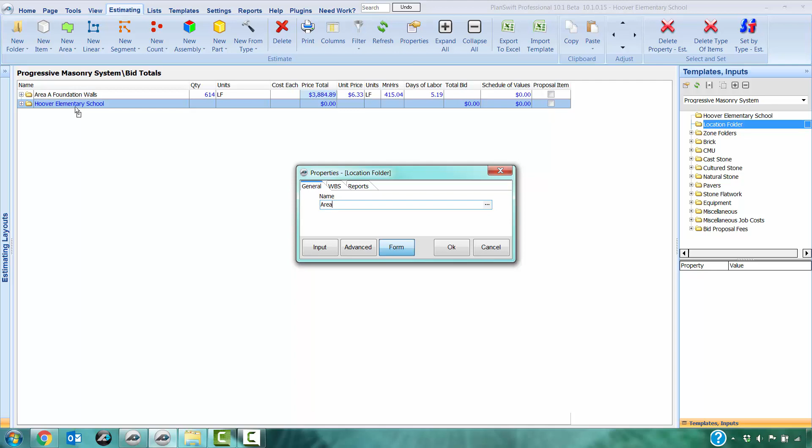All right, on this job here, the building is divided up into 3 different sections, so we are going to use the location folder, and we will just drag that in, rename it. In this case, we're doing area A, and we'll expand that so we can drop in a zone folder, a couple of them actually. We will throw in the CMU and the brick. And I'm going to move this to the top. Okay. All right, we're good to go.

I've spent about 15 minutes here looking through some stuff, so we're not taking too much time looking for details, so should be able to go a little bit quicker here. All right, so there's our folders. We're ready to roll. I guess let's start here. We got an elevator right here, and let's see, that is 29, wall type W1, 29. Number 5 at 48.

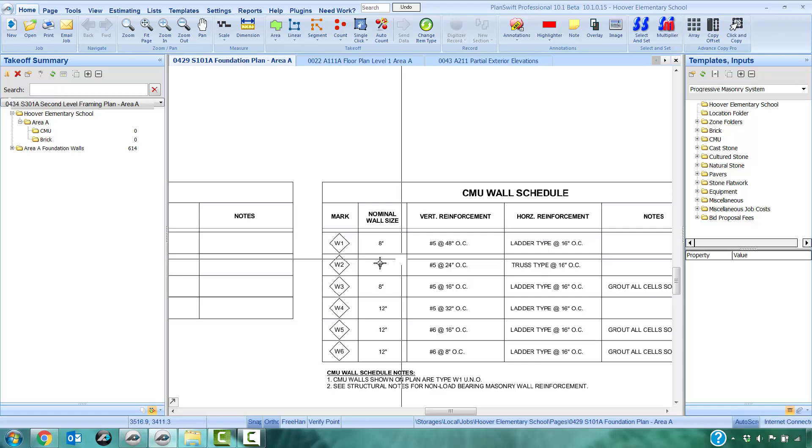Okay, so we're gonna open up our CMU folder. There's our CMU assembly, and we're gonna left click on it. And I found that it goes a lot quicker if you stay off the actual digitizer, the page. If you drag it up around the top, it seems to load in faster. Here in this case, it might not with the video running and a few other things I got going, but if you drag it across the page, it seems to take about 2 to 3 times as long for some reason.

But that's what the great folks at PlanSwift have left us with. A 32-bit system that 20 years ago I was playing 64-bit video games.

Okay. Again, we were 29. We are going to do scaffold. We are on the floor plan. If you uncheck that, you can actually draw out on the elevation views, and it will actually draw the digitizer 29 feet tall, I guess you would say. Line side, that's your choice. You pick what you're going to do there. In this case here, I believe I'm going to have to switch since I'm going on the inside of this wall.

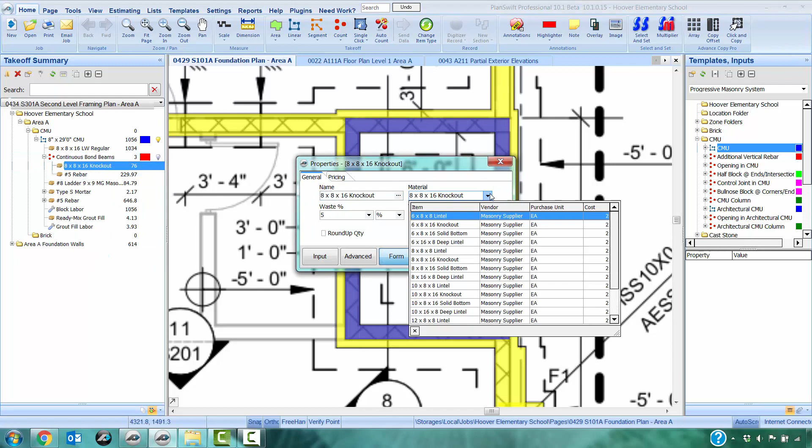So I'm going to change this to the solid bottom. Whoops, I could have done that a lot easier. But anyway, to get the other ones, what I'm going to do is I'm going to duplicate this. I should have left it. And what I'm going to do is right here, I'm going to select the 3 again. And then I'm going to come here and change the block back. So there we go. So now we're back. Now we got 3 knockout courses there, and we have 3 solid bottom courses there.

And I forgot to mention, if you duplicate that and do them separately, individually, you need to leave this blank. So we won't do anything here since we're going to duplicate that. So we will X that out, come back here, and we got 3 of those.

The reason why I do them separately is there isn't a whole lot of difference in one block and the amount of grout it takes to fill a solid bottom bond beam block compared to a knockout. But on this school, we're probably going to be hitting somewhere around 100,000 blocks, so it's actually going to make quite a bit of difference.

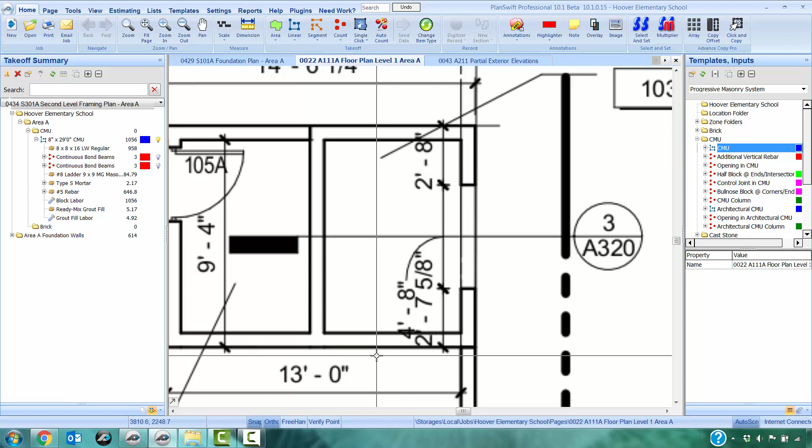Let's see, we got an opening here on this too. Let's go to floor plan, see if they give us a door size. Well, yeah, you got 4'8" there. Okay. 4'8", and again, I'm looking at my other screen here. It'll be 4'8" by 7'4".

So what we'll do is we'll come over here to the right, and right here we got our opening in CMU. We're going to click on that. I'm going to drag it around the top. You must drop it in the wall that the opening goes in. Some of you are just dropping it in the folder, dropping it in random places. That is only adding stuff in. Actually, it's not subtracting anything if it's not in the wall that it actually comes out of. So it's very important that you get that in the right spot.

Here on the opening type, it's got a few options put in there. You can type something in. You can put in whatever you want, call it whatever you want. If it's a window opening and you call it a door opening, there is no difference. It does not know. It's basically for your reference only. So set door frames, that is linked to a labor part, and it just charges a set amount that you specify for setting door frames for the CMU walls after the fact, obviously. So we're 4'8", and we were 7'4".

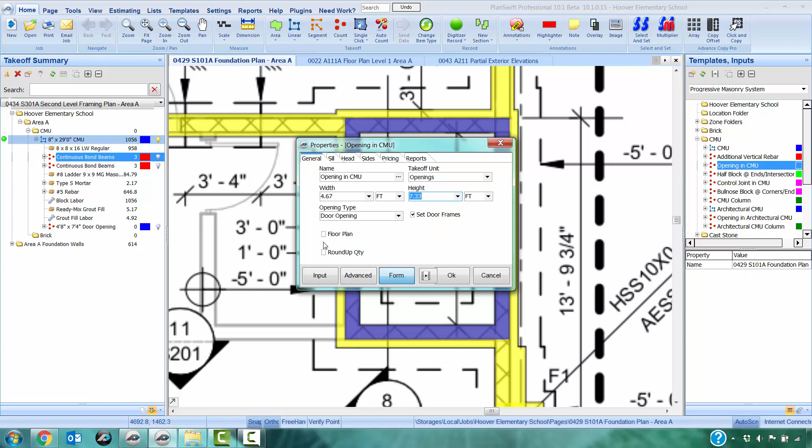Let's see, floor plan. Actually, most of you don't have this option, but anyway, if I hit floor plan, that's going to give me the option to actually put my opening here on the floor plan instead of going to another page and putting it there. In this case, I'm going to do that. Once I click that, you see this symbol rotate box pops up. The default is the door is going to be basically sideways here, like you're looking at it from the top. So we'll just do it and you'll get a better idea.

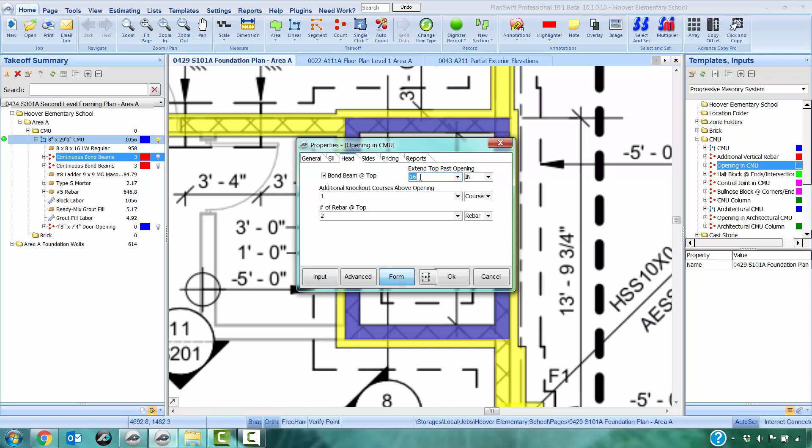Door opening, we got nothing there. In this case, we're not going to have those either. And what do we got at the top? We have a solid bottom bond beam with one knockout above it. So we will select one there. There's our solid bottom bond beam. We have two number 5s, so we're going to select 2 here. And we got to be 16. And this number here, this is each way. This is not a total. So this is 16 off each side of the door, so 32 total.

Verticals per side of the opening. This is the additional bar at the jambs. On this job here, we actually have 3 on each one. This here, it's going to grout those cells. It's always going to grout at least those cells, no matter what you enter. You can make it grout more. You see that occasionally where you have 1 bar but 2 grouted cells on the side. If you leave it set to what it shows there right now, that is simply going to grout everything with rebar. And again, the pricing and reports tabs, we're not going to mess with. So we'll hit OK.

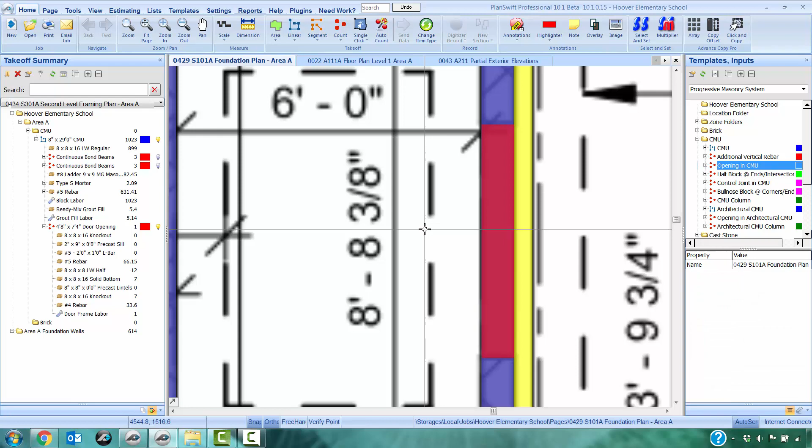And we're going to drop that there. I'll change the color on that. So what it did is just put my opening here, and put it to the size of the wall. So I can just drop it right there, instead of going to another page and putting it there. And that's what this symbol rotate does. You'll see it start to move here depending on what you select. Obviously 180 is not going to be a difference. So it is what it is there.

And even though most of you are used to seeing that big opening like that on an elevation page or a wall cut or something that you throw it on, it doesn't matter what size this thing is, it's in there. It is making the proper calculations. It doesn't matter what it looks like because it's all based off of the information that we input. The size of the opening, since it's a point count, is really inconsequential, because it just makes no difference.

So that's it for our elevator shaft. You're going to see the dead properties in here. If you want to, you can delete them. Myself, I actually have written a little script to delete this stuff later on when I click a button. So I'm not too worried about it right now. If you are, you can delete the items that you have not used.

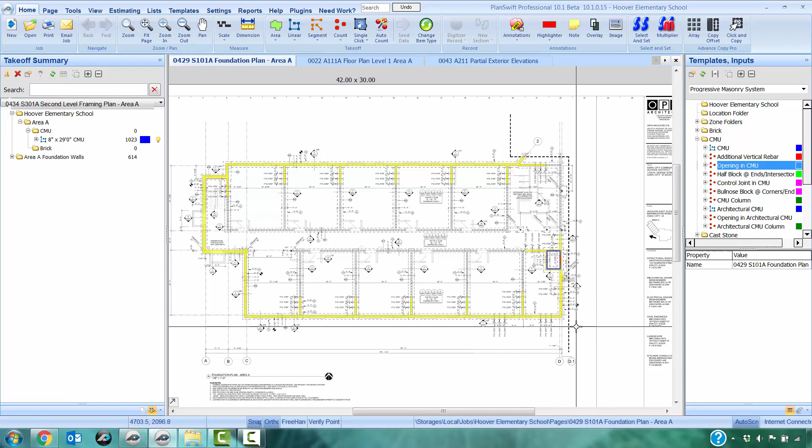We're going to be 28.8 with 1, 2, 3, 1, 2, 3. Wow. We're going to be 28.8 with a bunch of bond beams. 28.8. So what I'm going to do is I just right clicked on that and I'm going to duplicate that wall. It's got some things already set for us. You see when I duplicate it, it just has a 0 value, but it has all the settings that we altered are still where we put them. It's basically just a fresh one. So instead of dragging another one in, I just do it this way.

So we're gonna be 28.8. Again, that stuff's right. That is right. And I'm gonna rename this exterior CMU. Change the color. All right, the rebar. I should have looked. I think these go to 24 if I remember right. And again, the rest of the stuff's going to stay the same. Bond beams, we're going to leave it blank again because we have two different types. They're already put in there. We just need to change the quantity on them maybe. So that's it there. Let's check that here. Yeah, 24. So, all right, we're good there.

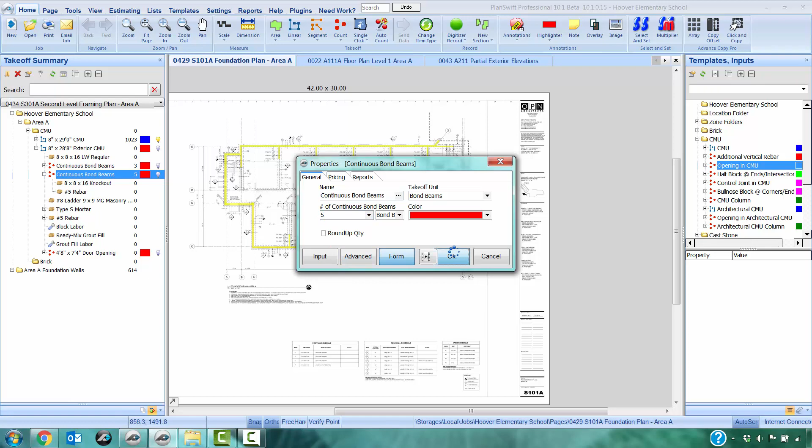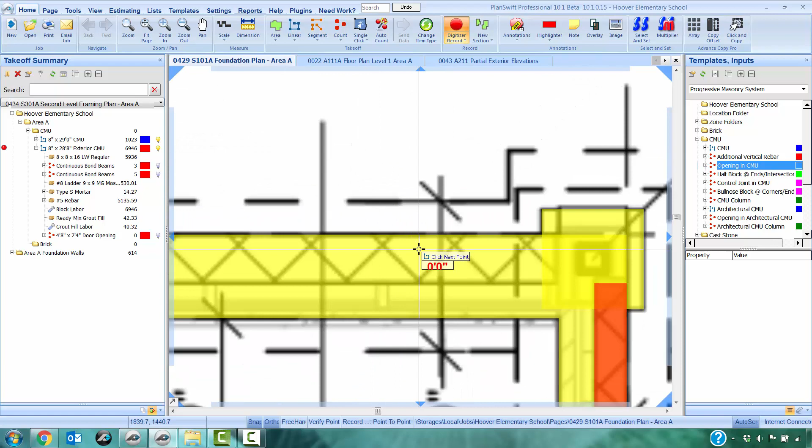What do we have? 3 solid bottoms. There we go. We need to change that one. We actually got 5 knockout courses there. So, okay. What else? Nothing. That's gonna do it. Okay. Start it up, and I'm just gonna start here right at the elevator and go. What am I doing here? Oh yeah, I'm stopping 11 and 5/8 short, so I just go to there. That's a 12-inch block there, so we're gonna skip that. Looks like I got 12-inch block all around this stair tower. We'll come up here and same problem here. Tell you what, we'll do this, and we'll just come back and delete that.

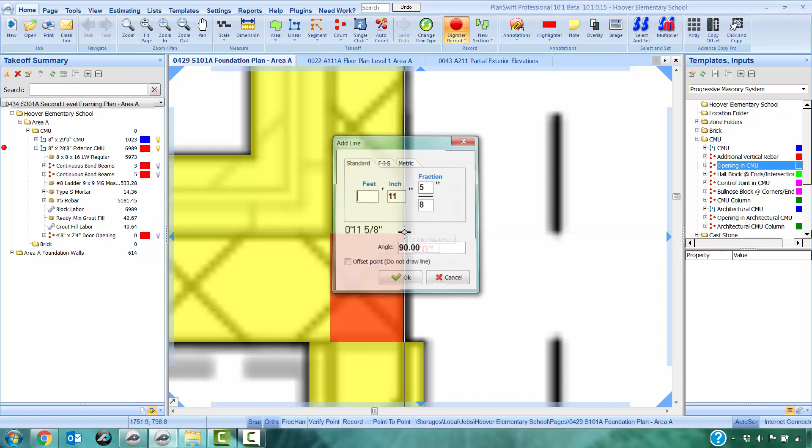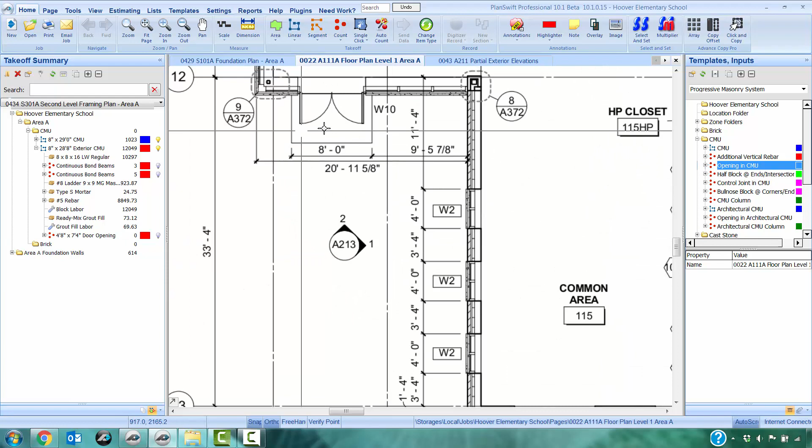Okay. Alright, that's it for the perimeter, or the majority of the perimeter. I'm going to come back here and just delete that piece. I'm going to run that 12-inch wall through there. I guess I always run the bigger wall through in cases like that, unless it's very specific not to. The bigger wall, the block costs more, so let's get a little more in there for it. So, okay, so we got that. That is the majority of our perimeter, except for this here. And let's take a look at that, where we got to be. 213. Okay. 1 and 2, 213. Okay, that'd be the 8-inch wall that we already have.

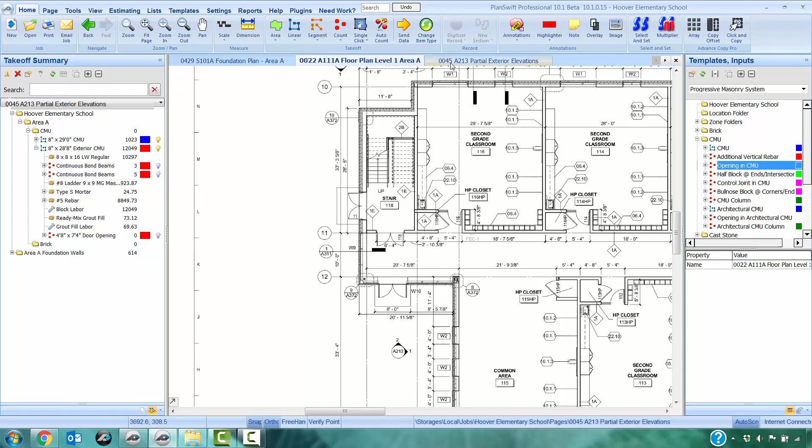Oh wow, we got 1 course. Now we got 2 courses because we're 1 course below the slab. The top of the foundation wall is actually at -8, so we're gonna have 2 courses of that 12-inch block there. So, and what's this? This must be where that continues on that other side. Is that here? Looks like it. We got that brick there and it stops. Yeah, it looks like that's it. So that 12-inch goes to where the brick stops. Where's that at? Grid line 11. So, okay. Alright, so we got that.

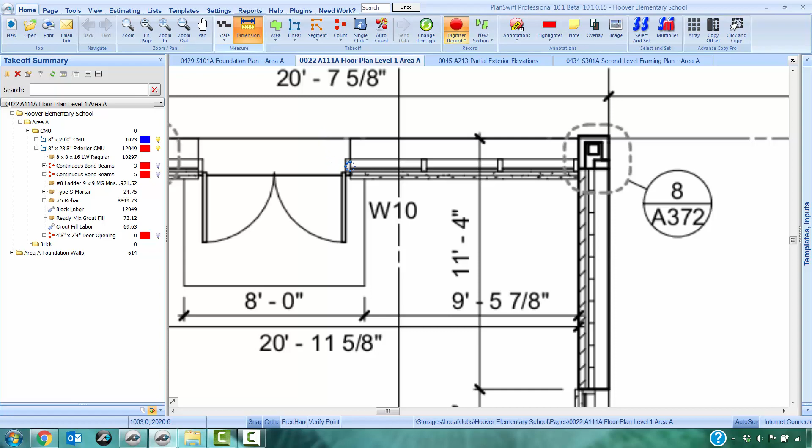Okay, so again, I'm just going to duplicate this. We got to change some things on it, but again, it duplicates a lot faster than it drags in a new one. So let's do that. We were going to be 2 courses. We're not going to have any scaffold there. Let's see. This is going to be. I'll tell you what. Let's just name this at. Whoops. Let's do that. I should have looked at that. No bond beams, obviously. Let's leave it at 24, see if we get lucky.

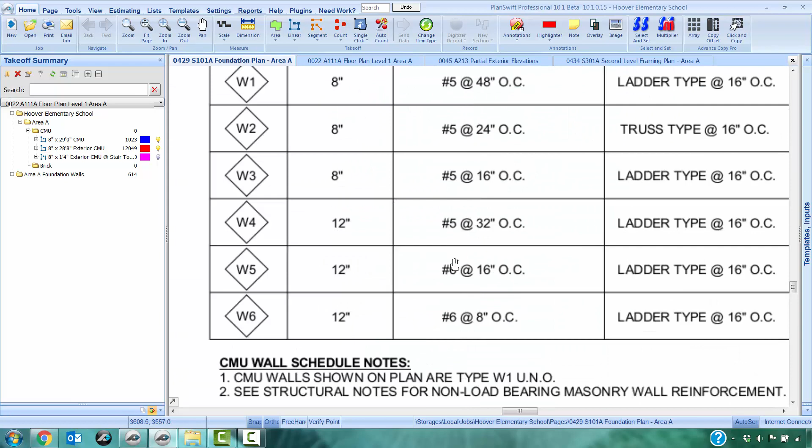And what are we going to do in that? Hell, they're going to have bars sticking up. Let's take the bar out. And something like this, we're just going to have to grout it solid anyway. Really got no choice. We got the rebar positioners left on, but without bar in there, the rebar positioners are going to be at 0 anyway. So it's not a big deal to turn that off. So let's hit OK. Let's get a wall type here, W4. W4, number 5 at 32. Swing and a miss.

Why the hell did I care about the bar? We took it out. Alright, good idea. Anyway, let's go back to drawing. Where's this one going to start? That's going to start in the line right here, so I'm going to do this.

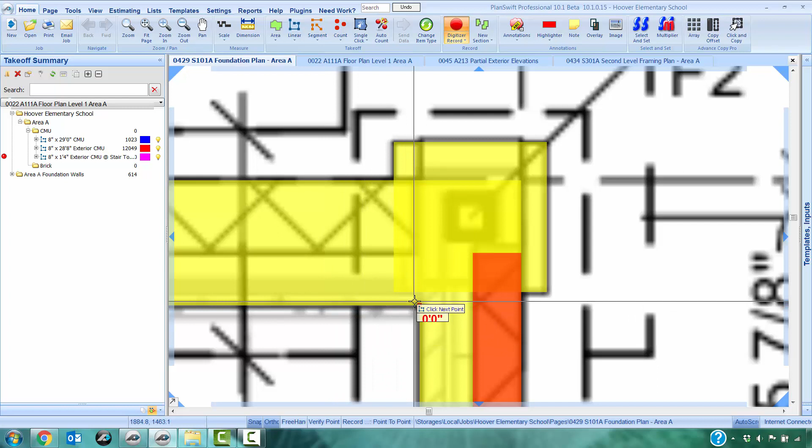Line me up. Don't worry about the line size. I will. We'll fix that. We're good though. What do we say? We're gonna go 10, 1. And let's just do a new section. And to get across the door, I'm gonna do this. So now I got that piece there.

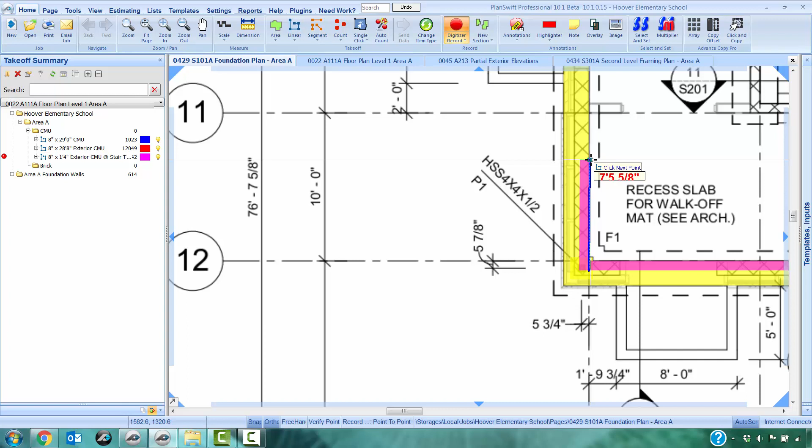And let's see. I know I'm gonna have to come back and change this one. Let's see, 10, 10, so that's going to be 10, 7 and 5/8. Alright, so let's go back and change our block that we never did. Where are we at? Right there. And 12. 12 by 8 by 16, lightweight regular, good enough.

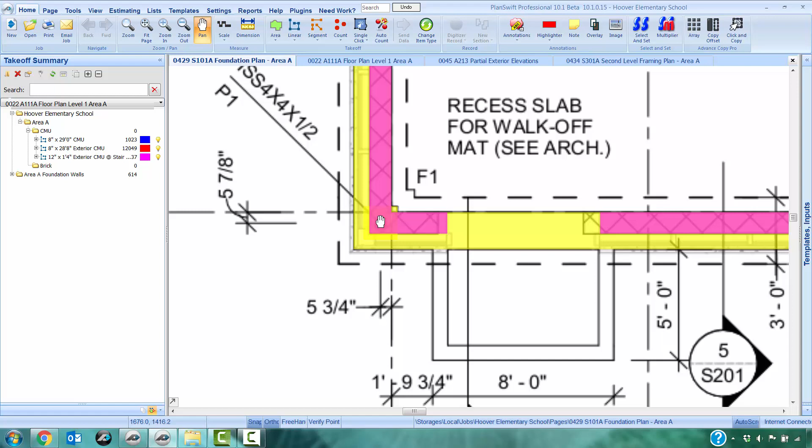But okay, and like I say, we got to come back and take that right to there. And I left that in there for this reason. Done. So we're a little off of what it shows. But if we look at it, it really lines up with where that stoop is. So it looks like just the block hatch pattern was maybe just a bit off.

So anyway, these here, since we do have them set, that's why we're seeing a negative number there, because we actually entered a value here. And I'm just going to delete them since I know we're not going to have them. And there we go. Now we're good to go. Obviously we're not going to have that. Okay, that's it there. I believe the rest of that wall is going to go back up to that 28.8.

So, whoop, wrong one. So we'll just take that one. Oh, son of a bitch. That was silly. We should have left those in there, duplicated it first. Anyway. Alright, 28.8. We're going to have scaffold again. Let's get us a different color. The bar, what was that? 32. 32 on center. Not grouting it solid this time. And we're going to leave those blank because we're going to fill them in.

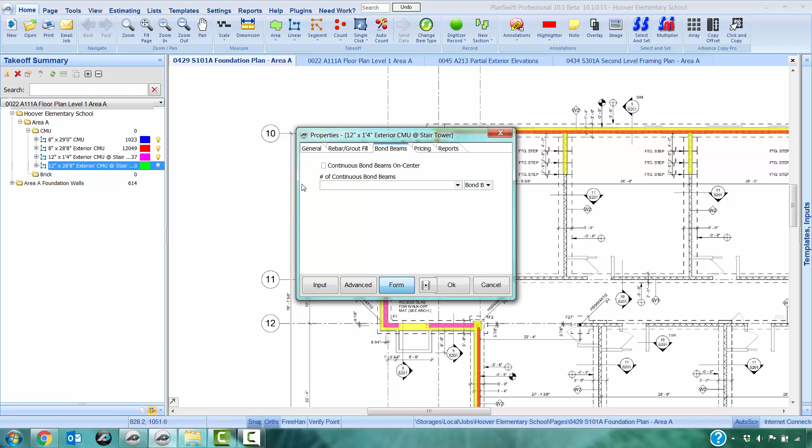We got 3, 3, we have 3 and 4. So let's go back to here. Let's get those. Of course, I can't copy them right next to each other like it should. So we got 3 and 4. So we'll just change this. Okay. Yeah, we're ready to roll. All right.

Okay. So there's that. We do have an opening there. I'll tell you what, we'll get our openings after we do the bricks so we can snap to them. Because we got opens and all that other stuff too. The reason I left this one out is that slab's going to get poured up there anyway. I guess maybe there's a chance that they would end up putting a block in there in the bottom, but not the top.

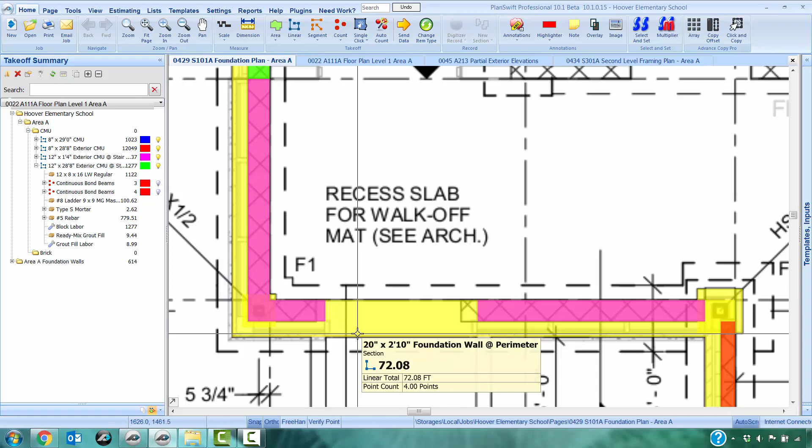But actually, no, there's not, because that would be the top of the slab, and they're not going to leave that exposed like that. So, pretty confident that they're going to pour the slab through there. But this one here, obviously, the block's 20 some feet above the top of the door, so we got to put it in there like that. Let's start getting these interior walls.

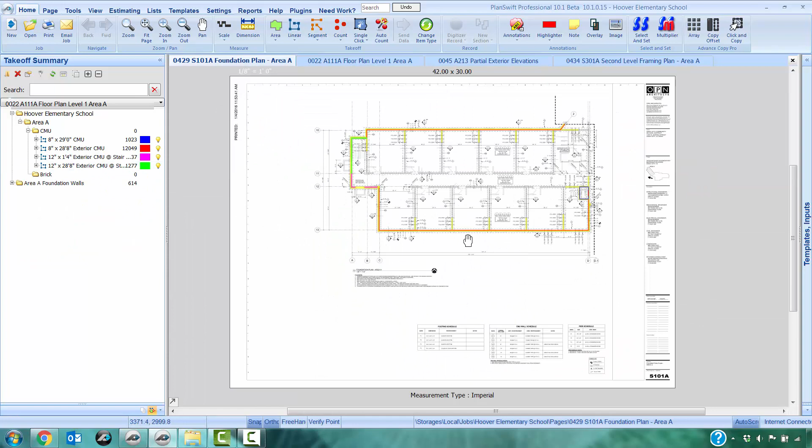13.4 to the top of the slab. 10-inch hollow core plank. 4-inch topping slab. 14. That's gonna make it 12'2". 12'2", and those walls are a W2. That's the 24 on center. Yep. So I am gonna take that one, duplicate that, and let me say we're at 12'2".

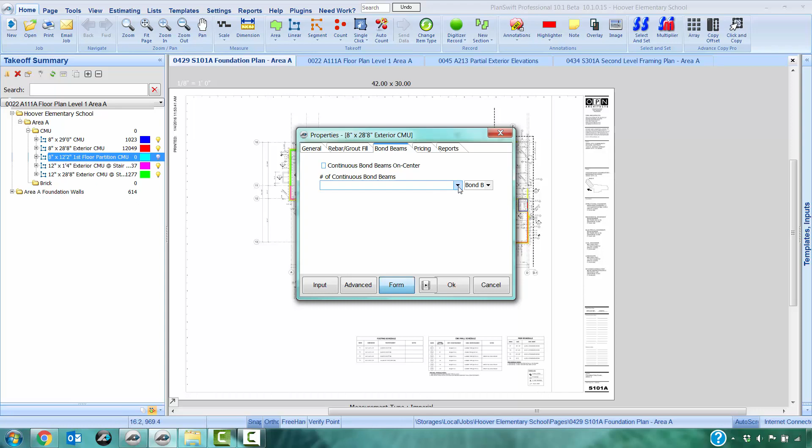Okay, and actually none of these have a door opening. Sure don't. Let's just get rid of that. I don't know why I'm doing that, but I wrote that script for it. Okay, so the way I'm going to do it is I'm going to do it to right here. Then I'm going to offset it. What do we? 32.8 I said.

And 27, 28.7 and 5/8. There we go. Looks pretty good. And yeah, stop short so we can run this corridor wall through. Actually, after doing the concrete, these footing spacings are the same here. What are we going to do? Tell you what, let's just do them both at the same time.

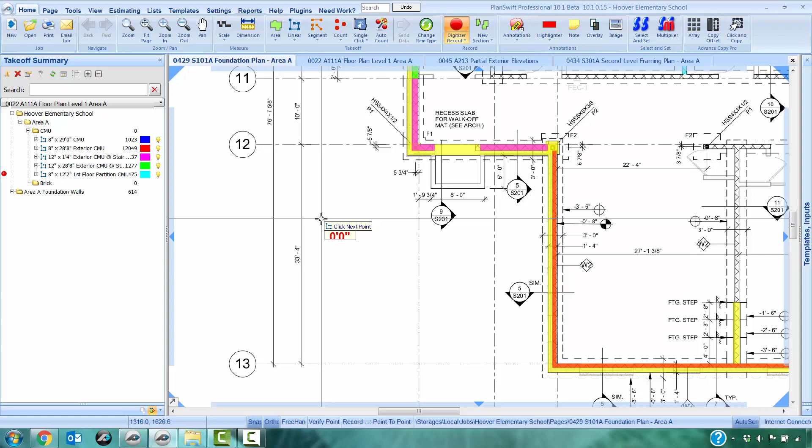I need to be where? 33.4, 32.8, and 3/8. 32.8 and 3/8. Can't even see it. So is that right? 9, 8, 3, yeah, that's right, 6. Okay, now we need to go over

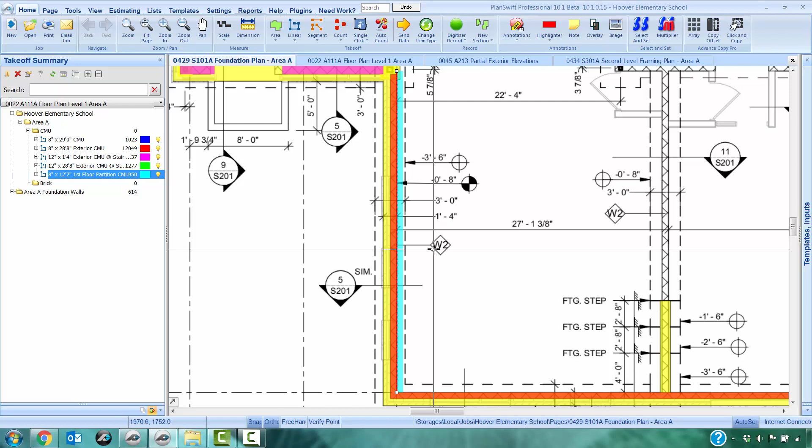26.5 and 7/8. Is that right? Sure looks like it. Okay, now you'll see these are all 28. Quicker way to get all these done instead of drawing them out: hit the control key. In this case, we're going to press the right arrow key because we want to go to the right. This nifty little box pops up. We're going to go every 28 feet. So we punch that in, hit enter, and I think there were 4 more.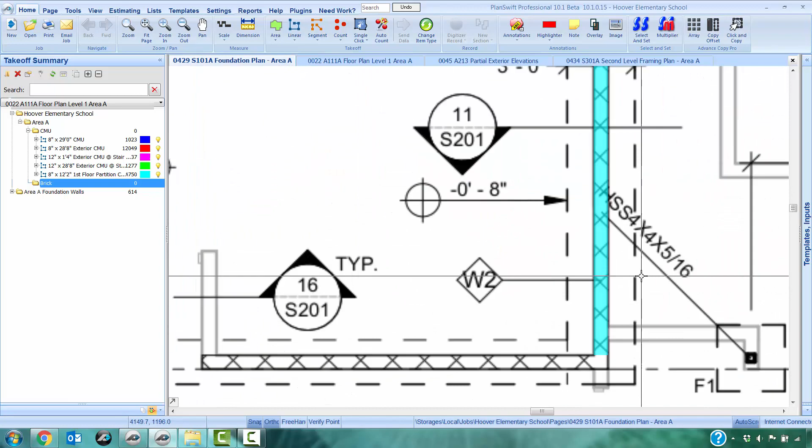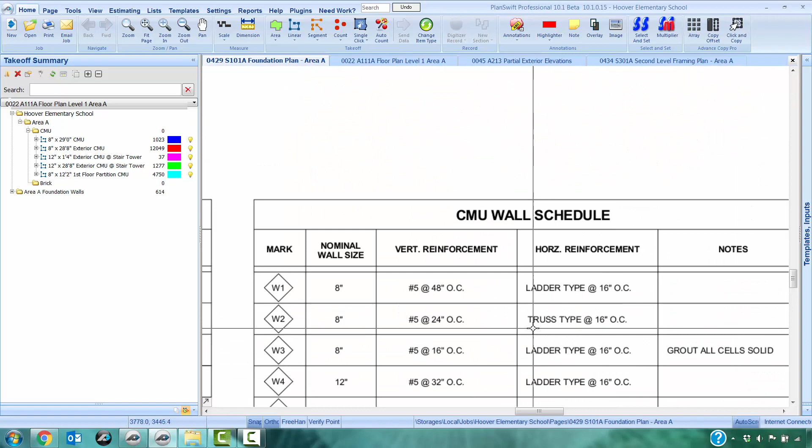So I'm just going to hit 4, hit enter, and you'll notice it's going to pop those in here for us all the way down. So didn't have to draw them out. So we got those done. Let's open up here a little bit. Alright, let's get a couple of corridor walls on here. Those are going to be the same thing. Nope. W1, weren't those? Yeah, W2. Number 5 at 48. So let's just duplicate this.

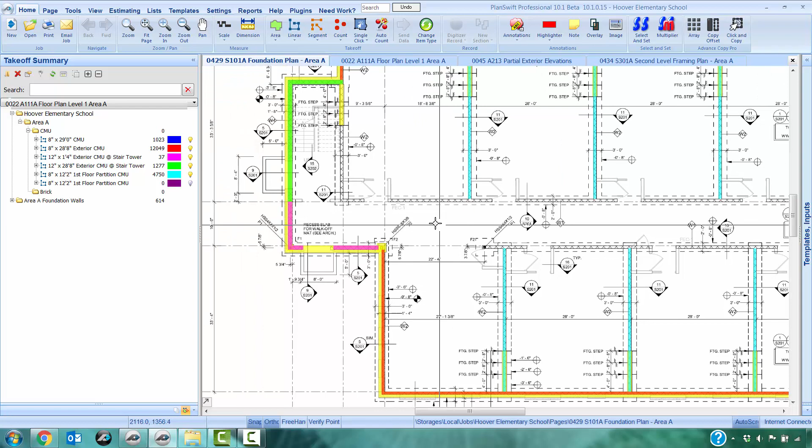And the height's going to be the same. That's good. Let's do that. 48. Bond beams. Same thing, so that's good. All right, how are we gonna draw these out? I guess I got that. No, I don't. Need some measurements here. I remember when I did the foundation, this wall actually stops here, so we need to stop 4'8" short of B. So let's get that one done.

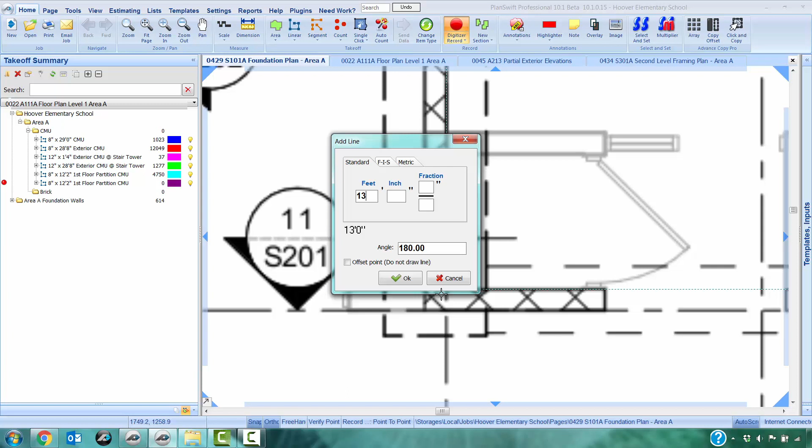What do I want to do? I'll just start here. So I'm just going to snap to here, and 4'8" short of that, 135.11 and 5/8. Okay, and just need to pop her down there. The other one, 22.4 is not right. What do we have? 21.9 and 3/8 from the inside of that wall. Okay.

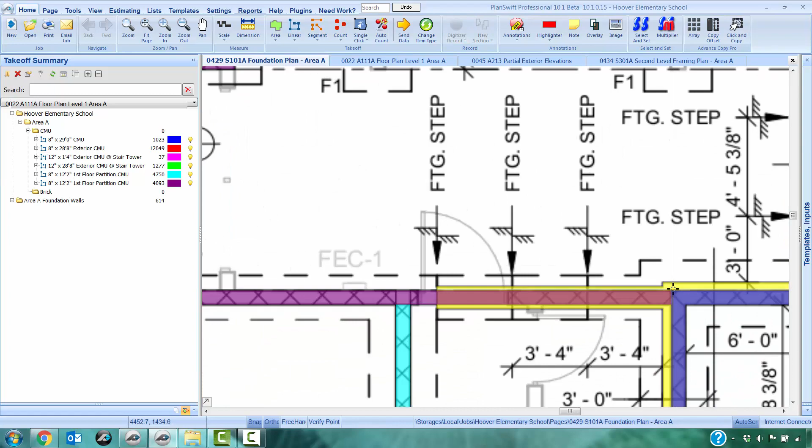Oops. So 21.9 and 3/8, and what are we gonna do? Well, we're just gonna go connect onto the elevator, and we'll come back here and take this out. Okay, that's it there. And actually, no, we got this one here. Let's find out what this is.

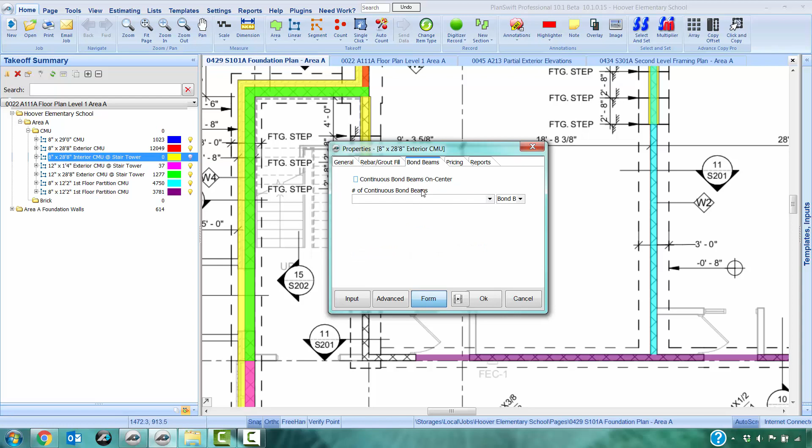That is 28.8 with 1, 2, 3, 4 solid bottoms and 1, 2, 3, 4, 5 knockouts. So let's duplicate that. 28.8. Oops. I just need that part. Okay. Oh, running out of colors. Let's do that because we're gonna get the yellow ones out of the way pretty quick anyway. W2, that is the 24 on center. We're good there, and that's good because we're gonna have to fill out multiple ones again.

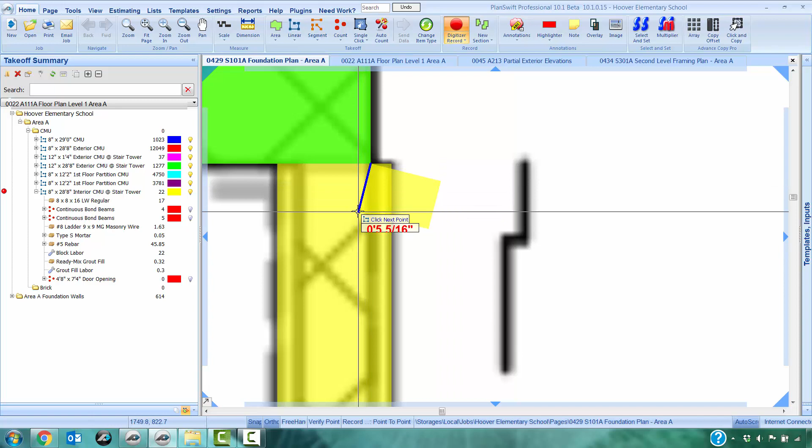Let's see, 1, 2, 3, 4. We got 4 solid bottoms and 5 knockouts. Okay, so we're good there. Let's do it. Oh. Tell you what, we'll do it this way. No, we won't. We'll do it up here. Let's see, we were 4'8". And we'll just go up here and snap to that corner. Alright, that's done. And we got no openings in that at all. Again, I don't know why I'm doing that when I don't have to anymore. Okay, that's it.

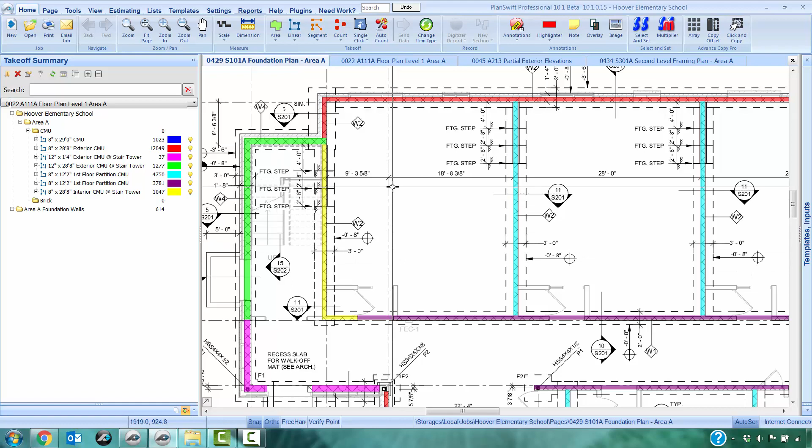We didn't do the openings yet, but it's going to be a lot easier after we put the brick on the outside. Actually the inside we do have a ton of openings here. I'm going to come back to them later. Let's get some brick going, 'cause I believe we're done with that. This here, I'm going to pick this up on area B. It's just a damn mess in there. Tons of different wall height changes and all kinds of extra grouted cells and stuff. So I'm going to pick that up a little bit differently than normal. So don't worry about that.

Let's see. Yeah, I think that was that one. Yep. I need that one too. Is that it? There we go. In this case here, since I can snap to the wall, I'm going to turn them back on to do the brick. What do we got? We got 28, and we're 8 inches below. So we're going to be 28.8 on the brick.

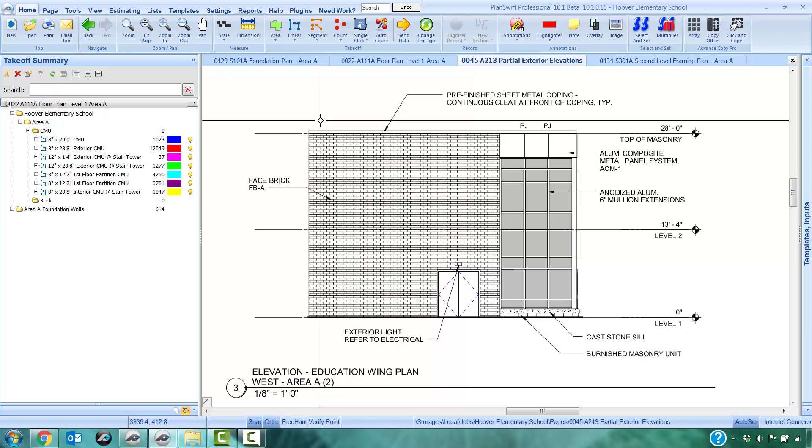And actually that's going to carry pretty much the entire perimeter except for obviously this area there and that there. So this area with the pink wall. Other than that, it actually is the 28.8. So let's get some brick going here.

And we actually have, doing a utility brick. And they got it labeled here somewhere. Yeah, there we go. face brick FB-A. I don't know. I've seen on here somewhere that it's a utility brick. But anyway, obviously that's something you can change anyway if you get it wrong.

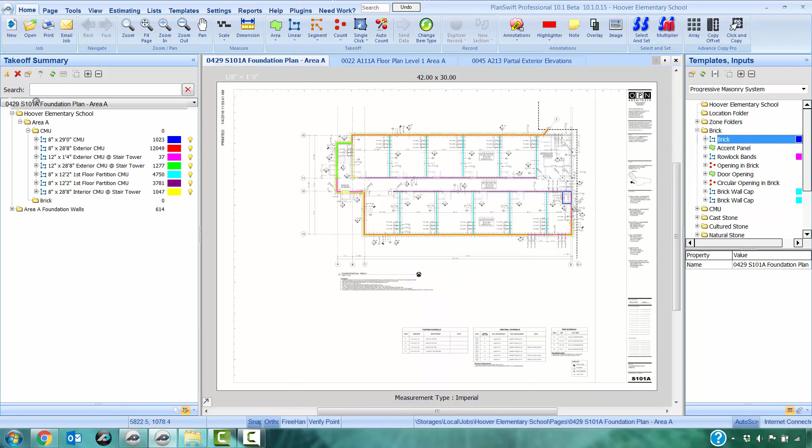Okay, so let's drag some brick in here. Not on this one. Let's go back to here. Try it again. All right. What did we say? 28.8. Brick. What was it? FBA, I believe it was. And again, same options.

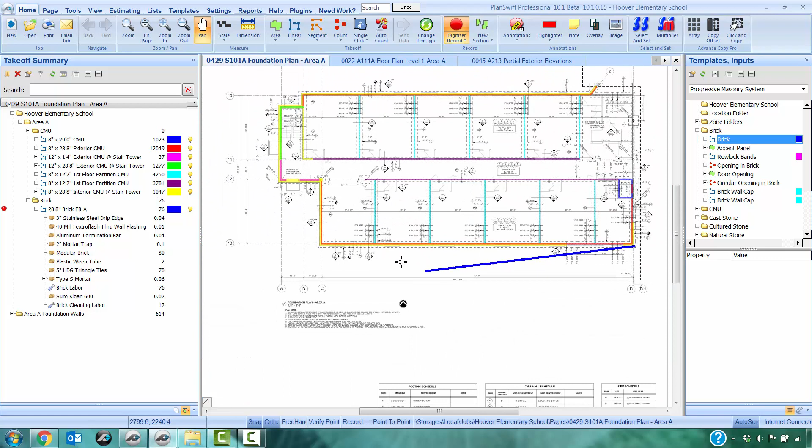I generally do the center on the brick myself because with the brick, you don't have to break it at every corner. In this case, I'm not going to do the center. I am going to break it at the corner due to the fact that I can snap to the wall, and that's going to make it much faster for me here. So, and I don't know how far back that is. So, what I'm going to do is this. I'm just going to take off from there. We'll come back and we'll get a measurement on that.

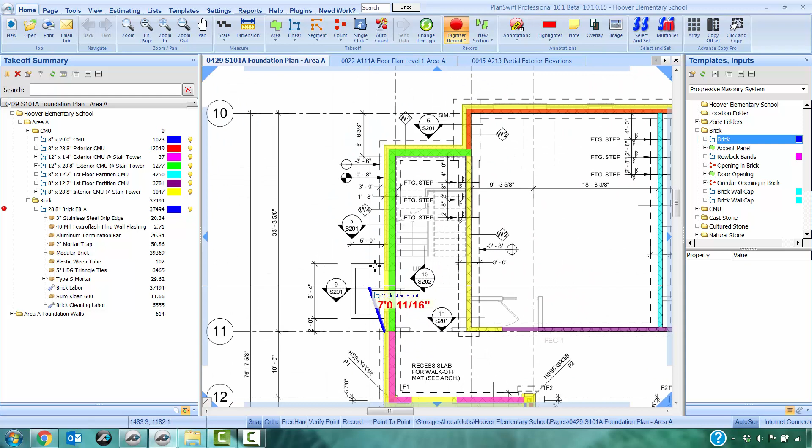And where's this go? Yeah, that is all the way up in there. Okay, no brick there. We start there though. That'll snap me right to it. There we go. Brick is done. Whoa, that's why we see an outrageous quantity. There we go. What else? Oh yeah, this down here.

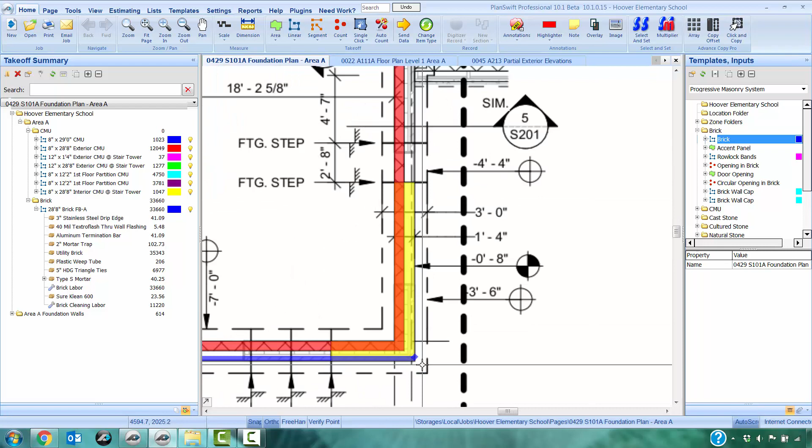See if we can get a measurement off here. We got one? No. Wait, what's that one? Bingo. Look at that. 20 foot 3 3/8 from the face. Oops. That was from the face. Already got that one there, so we'll just do that. Looks pretty damn good. Alright, let's go back and turn this off again.

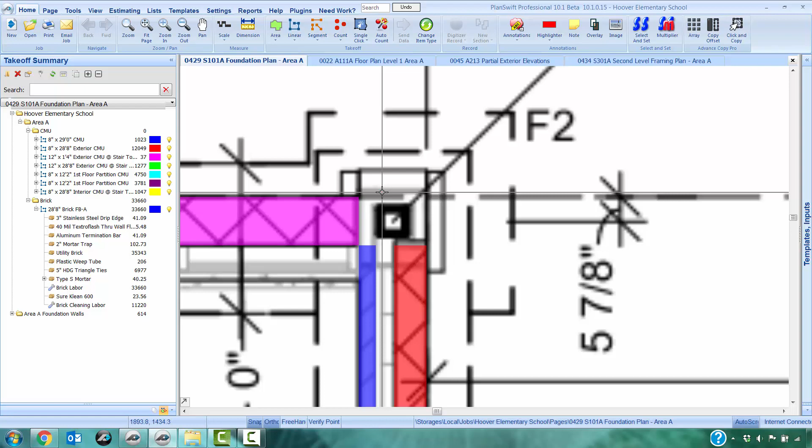Okay, so shrink this stuff a bit. That is it. Now we got our brick all the way around. I'm gonna have to look into that. That can't be right. There's got to be something going there. Probably a bullnose column block or something. I'll bet. Yeah, that's it. The addition area B continues that way. I just did this on the foundation stuff just to get the angle off there to get it going in that direction.

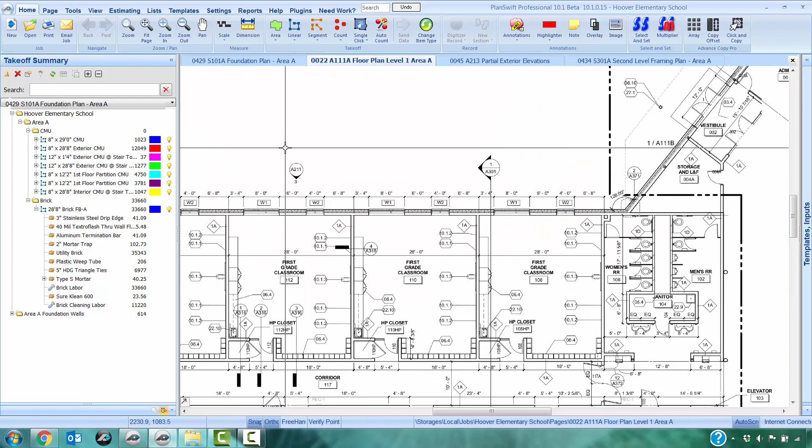So that's it. Let's do some windows in that brick. Where do we want to start? Let's just start up there at that top, huh? 3A to 11. What did I say? Oh, 211. Okay. 1, 2, 3. Yep. All right. Oh, whoops. What do we got? W2, W1.

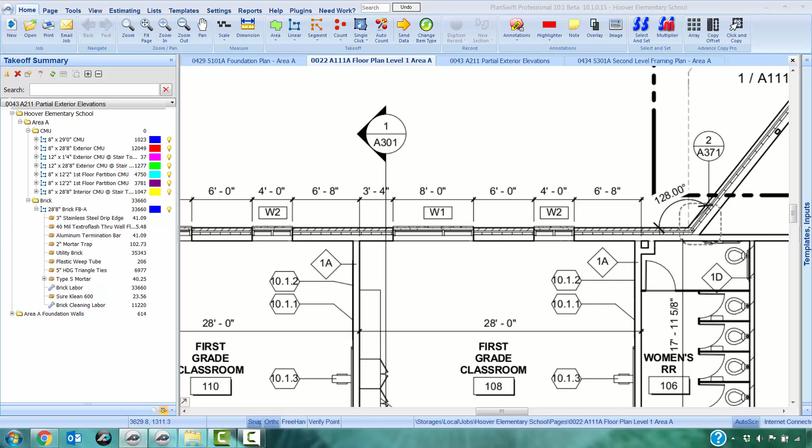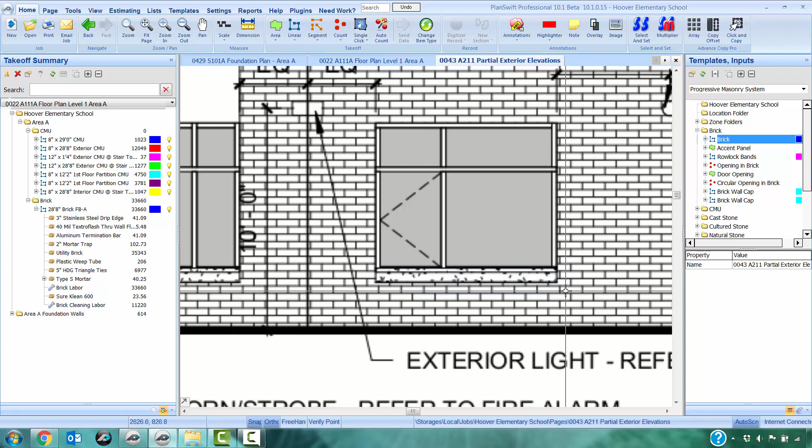W2 is 4 by 20 and 8 by 6/8. Okay. Let's go back to here. 4 by 20 on this one and 8 by 6/8 on those. This job here has these special, I guess they're making a big deal about cast stone sills, but obviously that's not an issue, because we have a button for that.

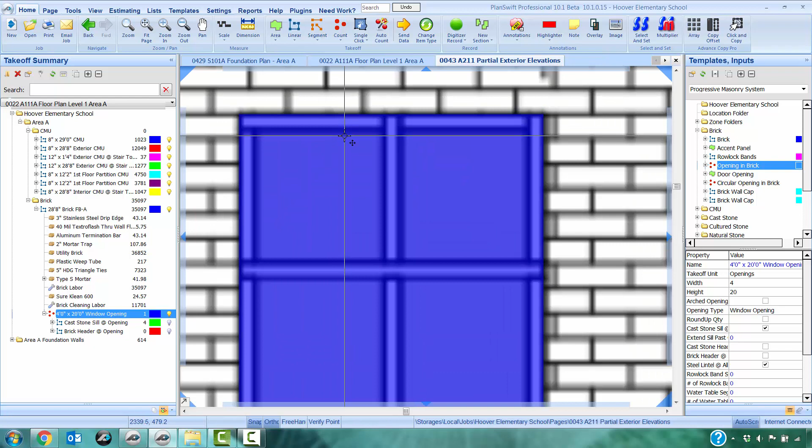Alright, 4 by 20, not an arched opening, it's a window opening, no brick sill, but there's a cast stone sill. It does not extend past the opening, so we're not worried about that. And we got no header at all. Yeah, there's going to be a steel lintel though. The rowlock water table, we didn't do that stuff anyway. There is none, so not worried about that. Boom. Alright, let's line her up just a little bit better to make it look like we care. Wowzers. I guess that bottom's drawn off a little different. Alright, so there's that.

You see that update that changed to cast stone sill. This has a brick header. Obviously with a 0 value, there's actually nothing there. You see these items here, they are actually included, and there's the lintel and there's the flashing, the drip edge, the things that go with the lintel. These other items would populate the ties if you had a brick header. There's a cast stone header. There's your header labor if you had the brick or the cast stone. So it says 0 value, but it's actually adding money in for these things. So,

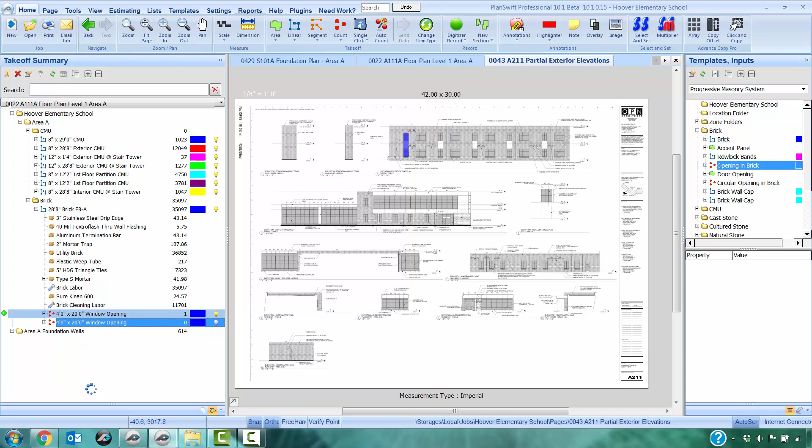and if we look here at the other one, that there must be set to number of pieces. Yeah. Got that on. Actually, I think this was 5 1/4 when I looked at it. And 48. Yep. So that's good. Okay. All right, looks good. I generally just check it over before I start duplicating it and using more of them, so that way I don't have to come back and change 20 of them when I'm done. Make sure it's right the first time, and then keep using it.

This one here was 8, 6, 8, 8 by 6, 8. Again, that's going to have that cast stone sill and no header. So essentially the same thing, just a different size. Let's see. I should have looked. 6, 10, 12, 12. Let's see. Awesome. So let's go. There we go.

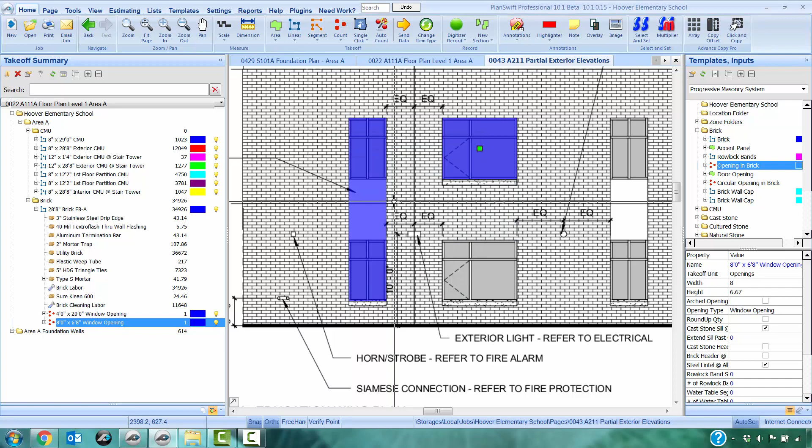All right. 13.4 was the top of the slab, so I'll bet it's going to be 13.4 center to center on these. Sure is. And if you remember, we had all those interior partition walls at 28 foot. I about bet that's what all these windows are going to be. So let's just find out.

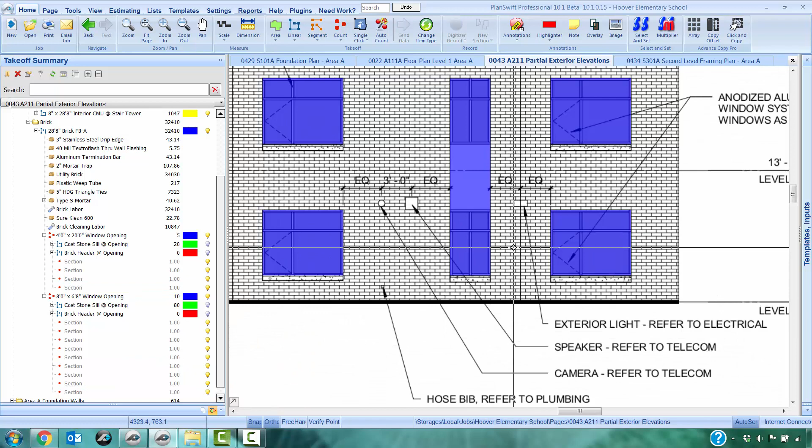Nope, missed one. Oh yeah, that was the other side. That's another 7 5/8, wasn't it? How's that? Great. Perfect. Let me just refresh that, get that crap off there.

Alright, so you got 5 there, you got 10 other windows there. And actually, on those 10 windows, the block is going to have the same thing. That one there. So let's do this. Let's see. 8 by, what was it, 6/8? 8 by 6/8. Not there, not there. Change that. Not on the floor plan.

Let's see. Oh yeah. Shit. Those had a bullnose sill. It's alright. Or no, that was another job. Never mind. That was a different job. Let's see. Nothing at the bottom and at the top. Let's go look here. Openings greater than 6 foot up to 8 foot. Okay.

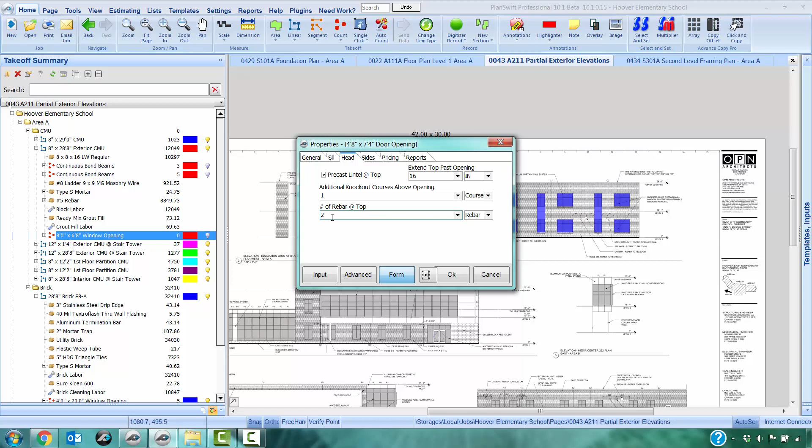We are going to have up to 8 foot. We can do an 8 by 8 precast lintel, one solid piece, it says. So we're going to do precast lintel. We do have an additional knockout above it. We are going to have 2 bar in the lintel. So that's set. And the sides, 3, yeah, so we're good there. So yeah, it's okay. Now what I'm going to do is I'm going to come back down here and I'm going to turn those off because I can't copy those.

What I'm going to do is I'm going to highlight those, copy them, and come up here to this other one. Paste as a sub item. Do you want to copy the digitizer points? Yes, I do, because I want a digitizer point at each one. And now if you look, boom, we got our 10 windows in our CMU that easily. The reason I didn't do the other ones is in the actual CMU, this part's still in there. This part here is the actual window, so they're 4 by 6'8".

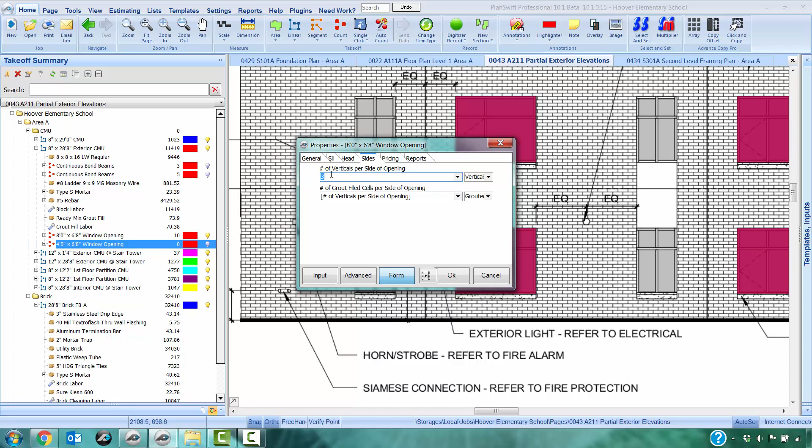So let's just do that right now. Let's duplicate that, and our width is 4. Let's see. No, that's not gonna be the same, is it? What do we got? 8 by 8 precast lintel, 1 solid piece, no knockout. 2 bars, still 16 past the opening, and nothing tells us any different on that, so we're just going to leave that there too. Let's see, this one here we're actually going to have to do a little work on. That was 12, wasn't it? Yep. And right here, I guess we can do it an easier way.

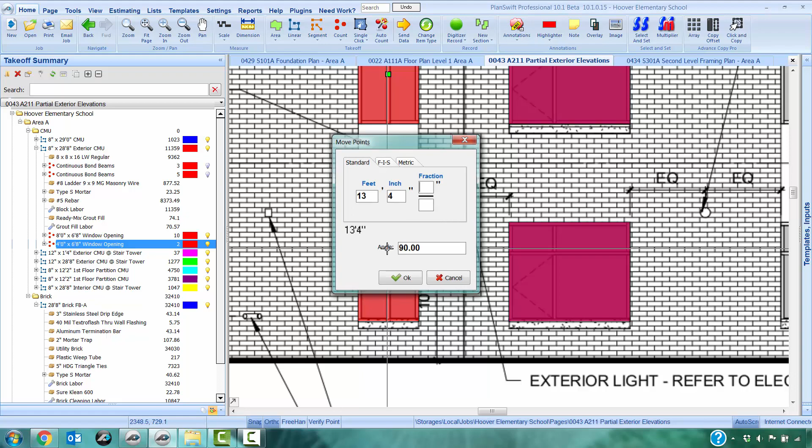Shit. Did it? Oh, that's why. Anyway, let's see, we're gonna go up 13'4". Alright, so we got those. Let's see. Oh yeah, the 28 again. So 28 4 times. Oh yeah, we gotta move that last one, don't we? Because that one wasn't right. Over, what was it, 7 5/8, wasn't it? Okay, so there's that. And what else? Oh, there's our other ones. Okay, so there's all the openings on that side.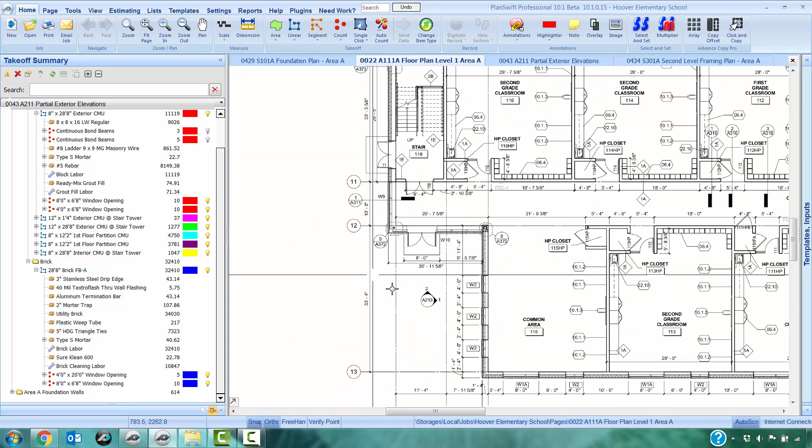What else do we got? I'll bet you over here they're about the same. So that'd be pretty boring. Let's do something else. No openings there. We got that door there. 1 and 2, 213. Let's go to that one. 1, 2, and 3, 213. Nothing there. That must be them same ones. W2, yeah. Yeah, let's throw them in real quick. Same one, so we'll just do this. Whoops. I'll line up the top because that bottom wasn't worth a shit last time.

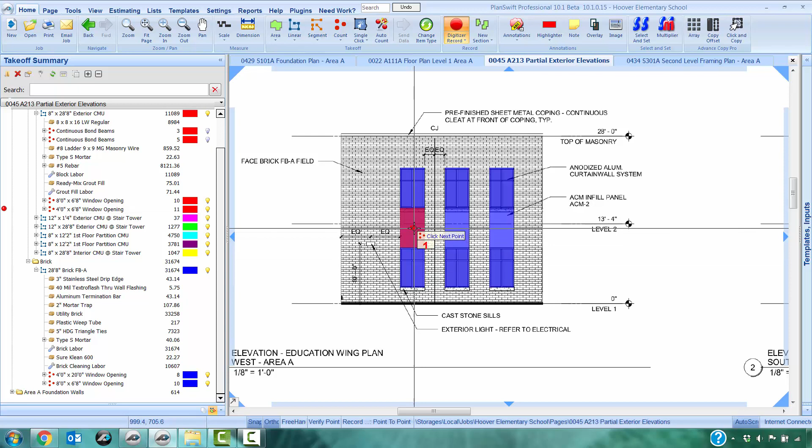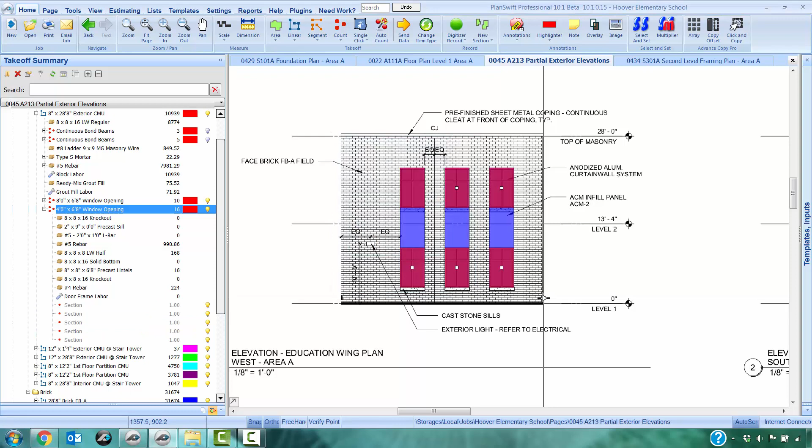Alright, should have looked here. 7'4". So there's those. And yeah, let's see here. And down 6/8. All right, so I'll get that bottom one, and there we go. Done. Nothing there because we left that bottom block out, remember? At least we got one here with both. What do we got? 11 must be the door, I guess, huh? 11. 11 is a 6'4" by 7'4" rough opening.

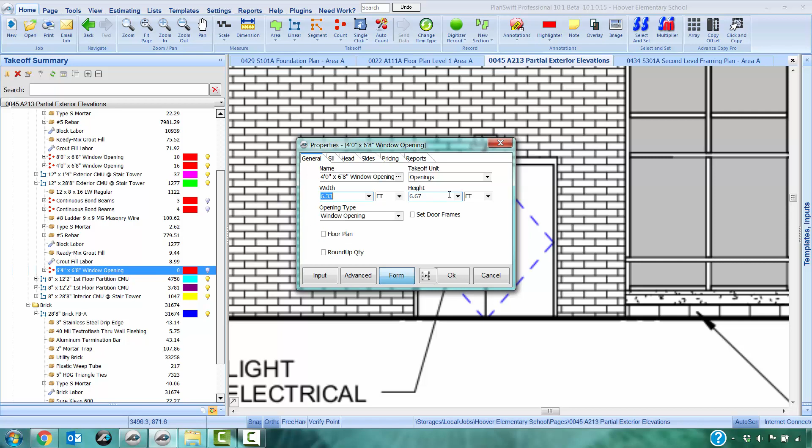Let's see, we're in that 12-inch CMU at 28. We're in that one there. So let's take, I don't know, let's take that, and this time we're not going to copy the digitizer points, we just want a sub item. And we're going to have to change it to 6'4", 7'4". Door opening, so the door frames, nothing there obviously with the door opening. That ain't good. Shit, we got to go back there and put those, or no, what was I thinking, not in the CMU, we don't.

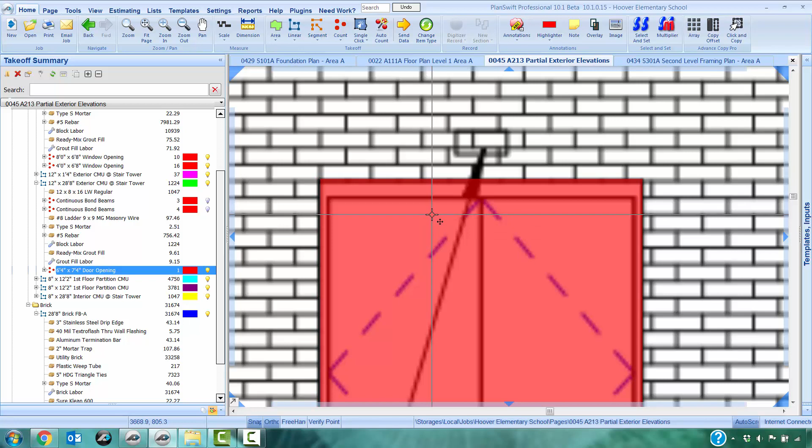Let's see, over 6 foot up to 8 foot, has one knockout above it. So we got a precast lintel, one knockout. Again, that won't change there. So we'll hit OK. And 7'4" by 6'4". All right, so boom. And is that right? Yeah, it is. Why is it?

Oh, I know why. Never mind. All right, so now we need to do that same thing here in the brick. 6'4" by 7'4". Door opening. No sill, no header. Nothing. In this case here, just one of them. It's about as quick just to turn it on and punch it in. Alright, that's all done. Okay, let's move on.

I'm getting bored with this shit. Let's, I don't know, what do you want to do?

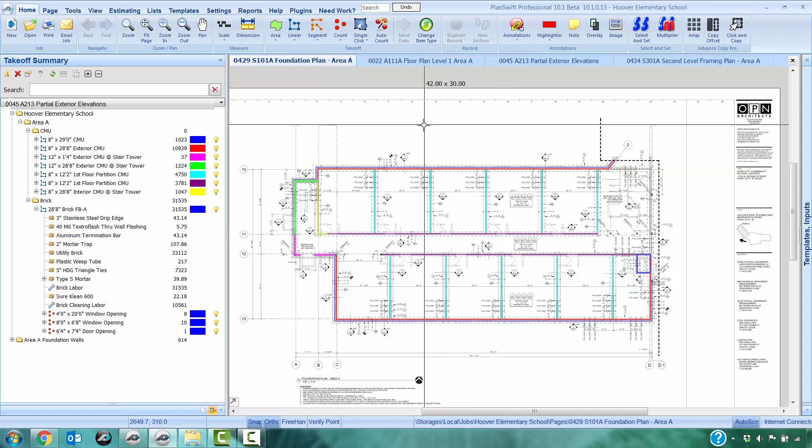Let's go to the report, change some pricing. How about that? I'll show you how to do that. Eventually we'll get there. There we go. Okay, I got an email here from them with a lot of pricing on it. Let's see. I gotta do that one. What do I got? Oh, I got the foundation walls put in there. So that's why we got 2 locations here. Okay. All right. What do we got first? 8-inch lightweight block, $1.18.

Right here. So what we do is we go to the cost column, not the cost each column. That will cause you a lot of trouble, and therefore that will cause me trouble when you call. The cost column always. So we'll go to here. I want to change the price on all of these at the same time. I'm going to click that top one. I'm going to hold down the shift key. I'm going to click the bottom one. Let go. I'm going to right click and I'm going to select fill with. And I'm just going to enter the number, hit enter, and there we go.

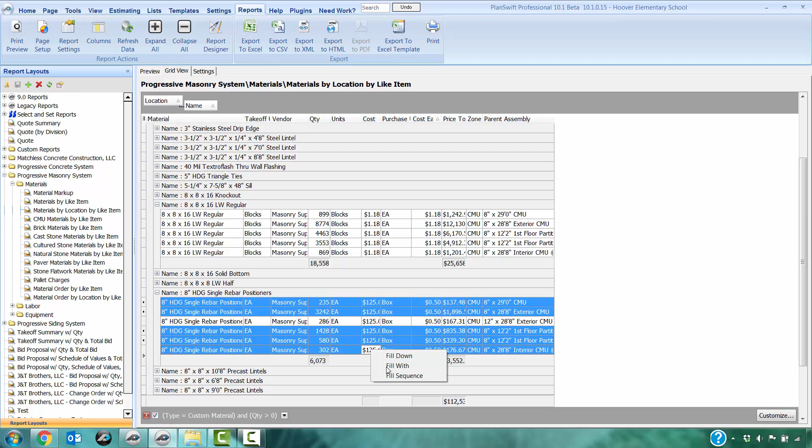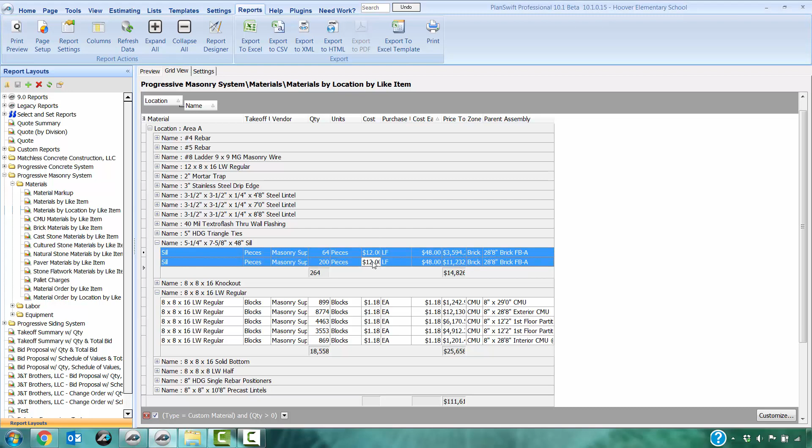And so basically I can do all but that one. So again, we'll just take those. Instead of holding down the shift key this time, we'll just hold down the control key and select the ones I want and punch that in at 90. And he does not have a price on the 12s. We will leave them for now. What else we got? Oh yeah, that high dollar sill. With freight. This is absolutely ridiculous. Absolutely ridiculous that we're spending that kind of money on some goddamn sills from Georgia.

Anyway, wire reinforcing, you got that? Does 190. What are we at? A little bit off. There we go. And what do we got? We got some rebar. So we got a rebar quote. Sure does. The rebar package has come out to 44 cents a pound.

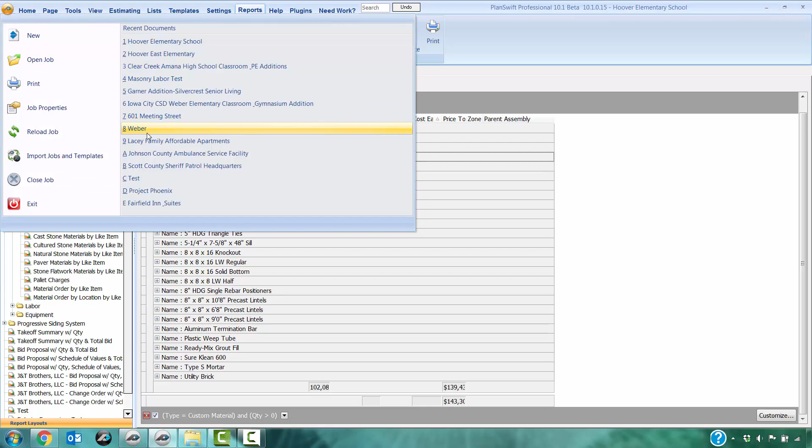So in this case, what we'll do is we'll go up to the top left, hit that circle, job properties, and we will navigate over to here to reinforcing. Yeah, we're close. 44 cents a pound. And while we're here, let's go over to miscellaneous, and being school addition, there will be no tax. So we're good there. So now we'll hit OK. Yeah, the rest of it doesn't have a quote on, so I'll have to get some prices from him. But that's how we update prices quickly, anyhow.

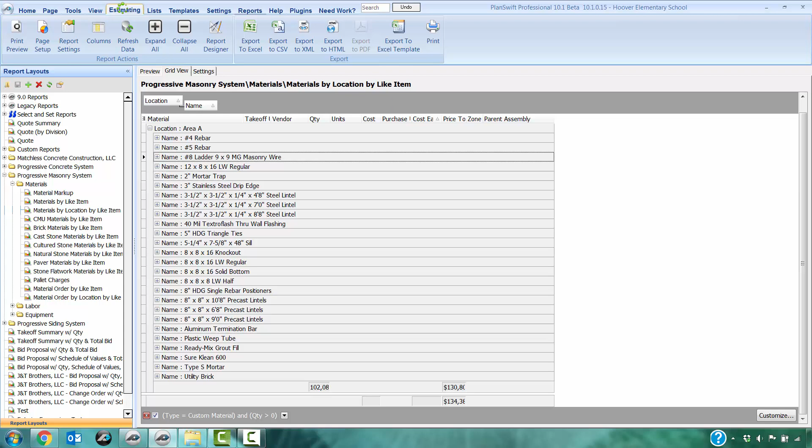Go to the estimating tab, see what we got here. And we can expand each one of these to see the items inside there. And again, this folder here, it's almost like it's not even there. It's not even adding up into anything. So we're certainly not concerned about it. I certainly would not trust these numbers either, with this not having a quantity. These numbers could be correct, but I would definitely restart PlanSwift to find out.

But we can throw some other items in here. Miscellaneous job cost. Drag it in here, drop it down below, somewhere outside of that job. It must be its own independent folder. It cannot be in that job. We cannot rename this. It must be named this. That is not an option. So we'll hit OK, and I'll have to open it up, see what we got inside there already. I don't even know what's in here. Yes. Let's take that and that and that out.

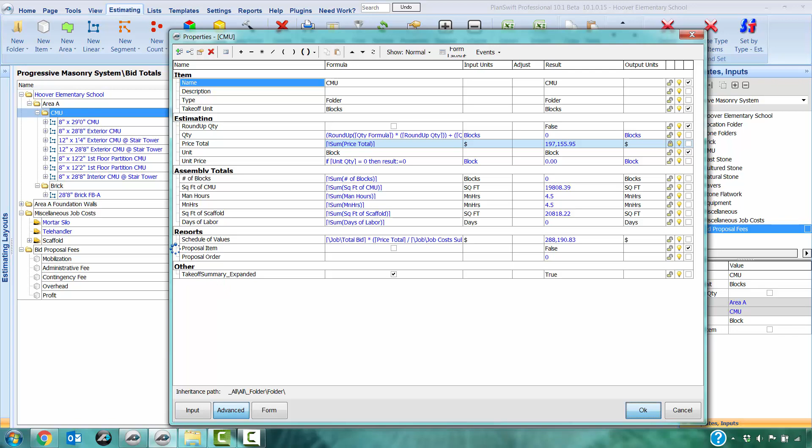Actually, the numbers did update up there, but I still don't like this one not having a quantity. Maybe there's a reason. There is, and a good one. I was working on that earlier, and I did not set it. So anyway, you'll see what we have here, 275. That is basically materials, labor, and equipment. That does not include anything in this folder, or in this folder. With the 275, if you add on this folder, the almost 31,000, and this one here, 96,000, you will come up with your total bid, 402, 403 basically.

And then you come over here, you can see the schedule of values for every folder and every digitizer. And you're going to say, well, why would some of the digitizers have a schedule of values on it? Because some of them needed it, and I wasn't going to sit there and pick them out. So that's why they all have it. You're going to notice the labor and materials do not have a schedule of values, but the equipment does, because you could actually put the equipment inside this folder, and therefore it would have a schedule of values.